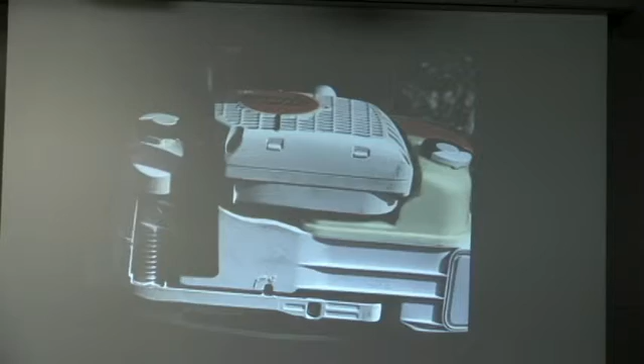Check the AV system and make sure all of the buffers are in place and functioning properly. Replace damaged, broken, or excessively worn buffers immediately, as they may result in loss of control of your chainsaw. A sponginess in the feel of the saw, increased vibration, or noticeable bottoming during normal operation may indicate damage, breakage, or excessive wear. If replacement is necessary, always replace the buffers in sets.

Check your air filter often. There are several different types and designs of air filters, and if yours is dirty, clean the filter according to the manufacturer's directions in the owner's manual, or replace it if necessary. Most filters can be cleaned temporarily by simply tapping them on a log, for instance, releasing the heavier particles that have built up on the filter.

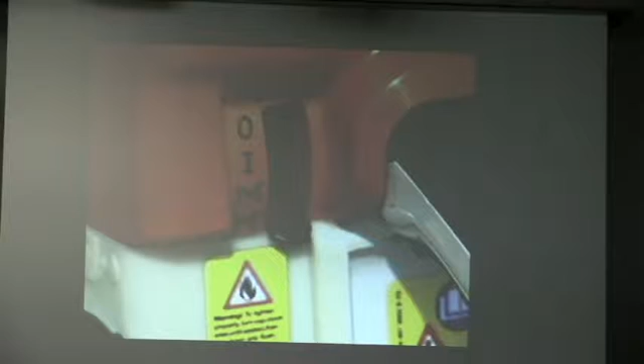A tip when accessing your air filter: always close the choke on your carburetor before removing the air filter. This will block sawdust or dirt from accidentally falling into the throat of the carburetor.

Occasionally, you will need to inspect your fuel filter. Be cautious not to do this around any open flames or other sources of ignition, as fumes from the tank are very flammable. Clean or replace the fuel filter as necessary, according to your owner's manual.

Make sure that the chain on your saw does not rotate on the bar when the saw is at idle. If the chain moves when the saw is idling, you must adjust the saw's idle using the proper adjustment screw on the carburetor. Check your owner's manual for more detailed information on your saw's idle screw placement and adjustment procedure. If you cannot get the chain to stop rotating at idle, take the saw to your authorized dealer for the necessary adjustments or repairs before using your saw.

Check your muffler and spark arrestor according to your manual's maintenance schedule. If you find that the spark arrestor is clogged or dirty, clean the part or replace it. Operating your saw with a clogged spark arrestor can cause serious damage to your saw's engine. Never operate your chainsaw without the spark arrestor, as the sparks from the muffler can easily start a fire.

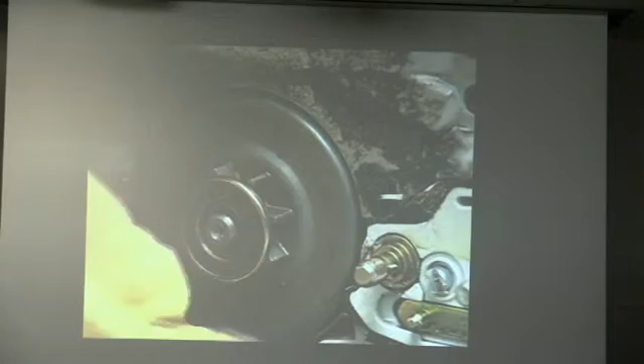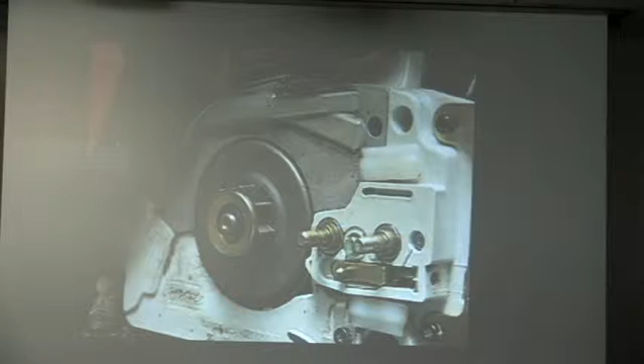The bar, chain, and sprocket will require frequent inspection and upkeep, and are some of the highest maintenance components of your chainsaw. There are two types of sprockets commonly used on chainsaws today: rim-type sprockets and spur sprockets. Sprockets will wear as the saw is used and will require replacement. A good rule of thumb is to install a new sprocket after every two chains that you wear out. Here is a new unworn rim sprocket, and this is a rim sprocket with considerable wear that should be replaced. This is a spur-type sprocket with no wear, and one that is worn and should be replaced as well.

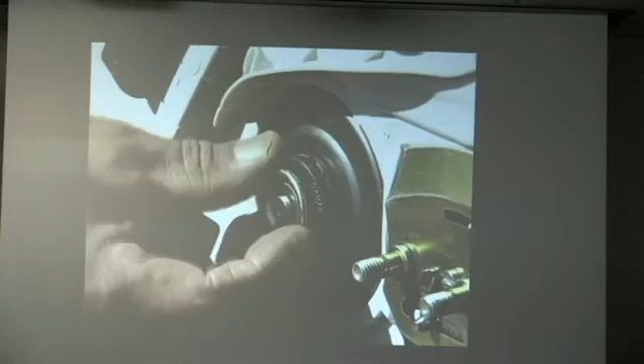The method for replacing your sprocket will depend on the mounting design used on your chainsaw. On most Stihl models, Stihl uses an outboard mount design that is very easy to service, even in the field. Simply remove the E-clip and the washer, and the rim slips off the clutch drum, and the drum and bearing will now slide off the crankshaft.

Now you can easily clean your parts and reinstall them, making sure to add a slight amount of high-temperature grease to the needle bearing and crankshaft. When reinstalling the drum on your Stihl saw, rotate it about one turn to make sure that you've engaged the oil pump drive.

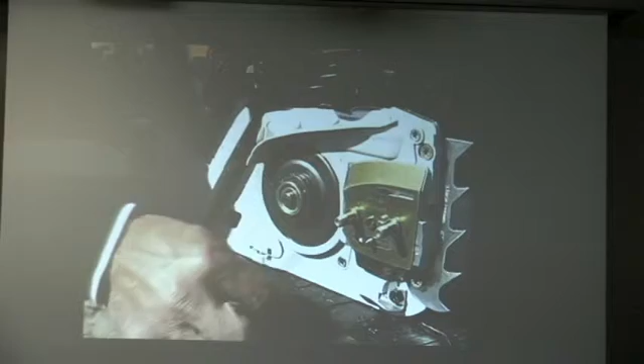Slip on the rim, and reinstall the washer and E-clip. Other styles may require the removal of the clutch first with special tools to access the sprocket for maintenance. Check your owner's manual for the procedure to properly replace your sprocket.

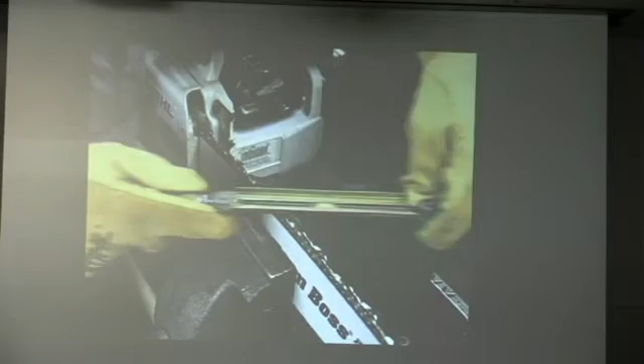Your saw chain will require sharpening. The frequency for sharpening your chain will depend on several factors, such as whether or not you have let the chain come into contact with the ground or any other foreign object, the type of wood you are cutting, and the amount of dirt or foreign objects that can be embedded in the wood.

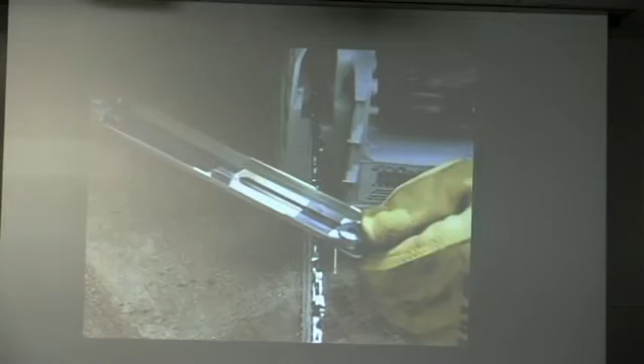Even a standing tree will have a certain amount of dirt embedded into its bark from wind-blown debris that will dull your chain over time. One good rule of thumb to make sure your chain remains sharp and in good condition is to file the chain with a few light strokes on each tooth using a file and guide each time you refuel, even if you think it's still sharp.

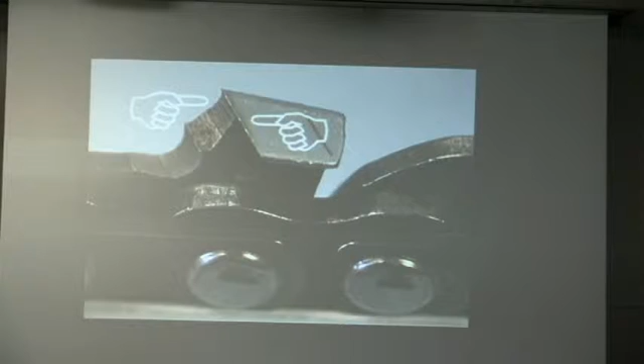You can determine the chain's condition by physically inspecting the cutter edges for rough or worn spots. Also, be sure to inspect the chain links and rivets for wear, cracks, or damage. If any part of your chain is cracked, worn, or damaged, you should replace it immediately and have the damaged chain inspected and repaired if possible by your authorized dealer.

In operation, your chainsaw is designed to cut effortlessly and with very little pressure applied by the operator. If you find that you have to apply excess pressure to the saw in order for it to cut, the chain is most likely dull. Or you may have a problem with your bar and chain lubrication system.

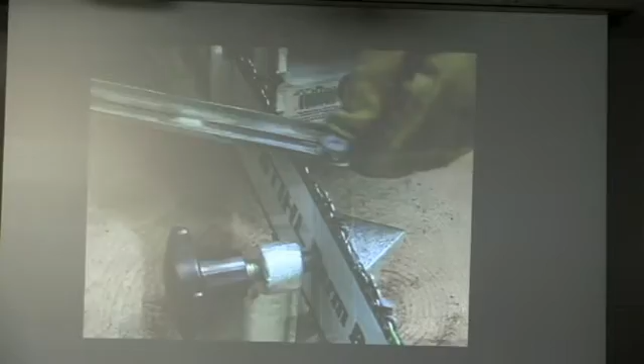Often when you find that you have to apply a lot of pressure to make the chainsaw cut, you will also see smoke coming off the tip of the bar, another good indication of the chain's condition or a lubrication problem. If these conditions occur, you may need to sharpen the chain immediately or replace it, and check the bar and chain lubrication system. To continue cutting with a dull chain or a lack of bar and chain lubricant will cause operator fatigue and a high rate of wear on critical parts of your chainsaw.

Another indicator to look for is if your chainsaw tends to drift right or left in the cut. This would indicate that the angles on your chain have been sharpened incorrectly and will need to be resharpened. Or it could mean that your bar rails have worn unevenly. This can also cause operator fatigue, unsafe operating conditions, or damage to your chainsaw.

With the right tools and instruction, you can maintain your STIHL bar, chain, and sprocket with confidence. Let's look at how you would perform this service in the field.

When you're ready to service the bar and chain, pick a large flat area to perform the work, such as the tailgate of a pickup truck. Remember, the chain has sharp edges, so always be sure to wear sturdy work gloves when handling the bar and chain. With the chainsaw engine turned off and the muffler cooled down and the chain brake released, use your bar wrench to loosen and remove the nuts on the chain sprocket cover.

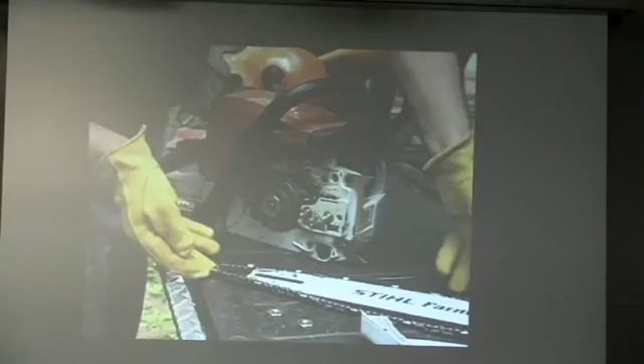Remove the cover, release the bar from the chain tensioner's adjustment pin, slide the bar back, and remove the chain and the bar. Check your sprocket and drum for wear and make sure they rotate freely.

If the sprocket is significantly worn, you should replace it.

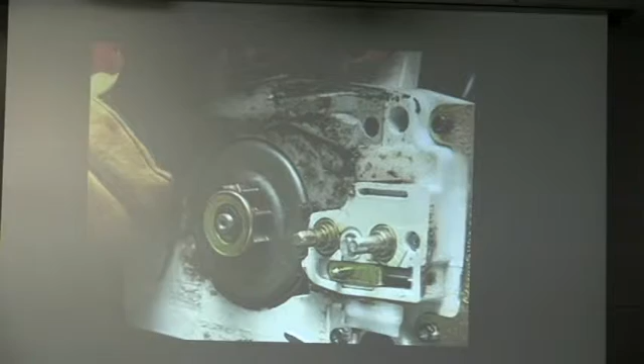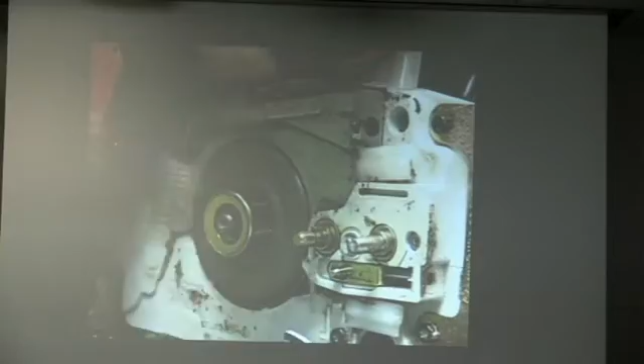At this point, it's a good idea to clean away the sawdust and debris that has built up on the saw with a rag. Even an old toothbrush can come in handy for this task. Clean the inside portion of the cover around the clutch drum area, taking special care to clean thoroughly around the automatic chain oiler's discharge area, not allowing anything to become lodged in the portal.

Your bar will also need to be checked and maintained. If your bar has a roller or sprocket nose, make sure that it rotates freely. Some bars may have a grease hole at the tip that will require greasing periodically. Check your owner's manual for the maintenance procedure for your chainsaw's guide bar.

Remember to always wear gloves when handling your bar, as the bar rails can become very sharp as they become worn. The rearward end of the bar will have a series of holes and slots.

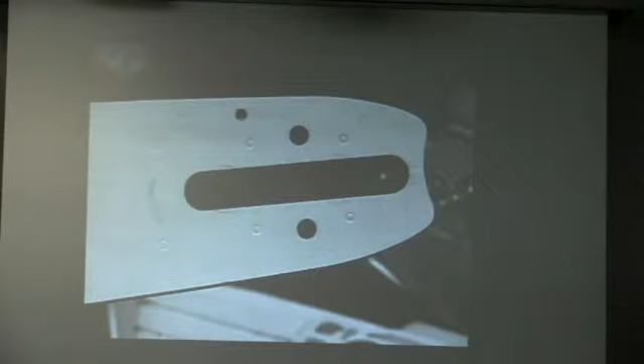These are the oil inlet hole, the chain tensioner's adjustment pin hole, and the bar stud slot. It is extremely important that these areas are completely free from dirt and impacted debris.

Through wear, you may find that your bar rails will form a rolled over edge. If this occurs, with a flat file, smooth the edges down, again making sure to wear gloves during the process. If the bar is severely worn, you will need to replace it.

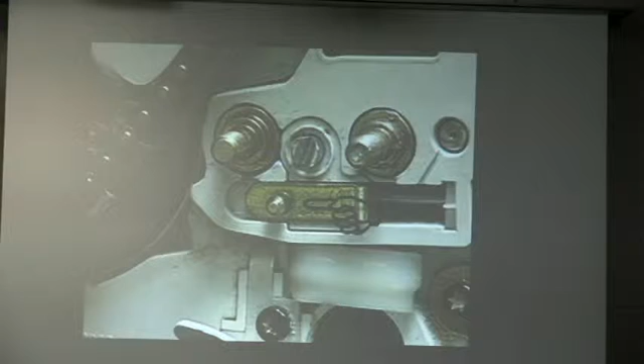Now that your components are cleaned, reinstall the guide bar on the saw. First, turn the chain tensioner's adjustment screw counterclockwise, allowing the pin to move back towards the sprocket. This will allow slack in the chain, making it easier to install.

When installing your guide bar, always place the bar with the opposite side up from when you last took it off. Doing so, you will displace the wear more evenly on both sides of the bar, resulting in a longer service life. Place your bar over the bar studs, sliding it as far back as you can.

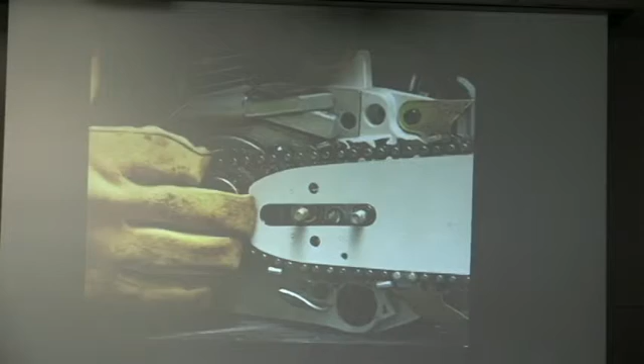Install the chain on the bar, making certain the cutting edge of the chain will rotate in a clockwise direction around the bar when looking at it from the sprocket side.

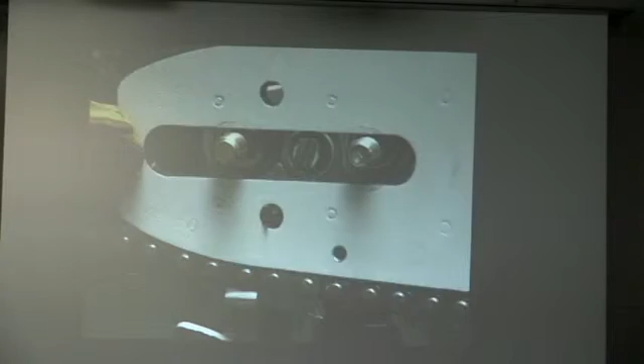Once the chain is placed on the bar, and the drivers are properly engaged with the sprocket, position the bar where the chain tensioner adjustment pin lines up with the proper hole in the guide bar.

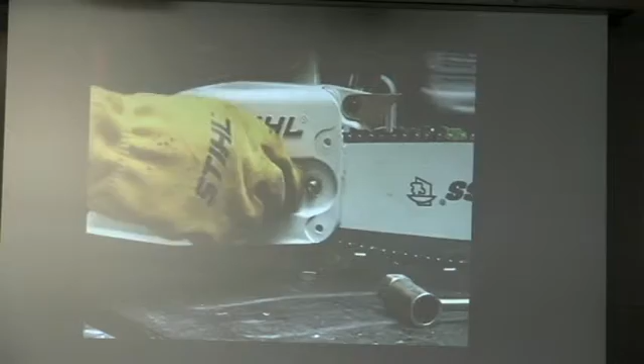Reinstall the chain sprocket cover and the nuts, but only finger tight, as you will need movement in the guide bar to adjust the chain. The bar will have slight up and down play.

To adjust your chain properly, turn the adjusting screw tensioning the chain to the point where it sits firmly against the bottom rail of the bar, but not so tight that the chain won't rotate freely around the bar. Continue to hold the tip of the bar up and tighten the nuts on the cover.

Double check your work by pulling down on the chain and letting it snap back, and by rotating the chain around the bar. If the chain doesn't snap back snugly against the bottom rail, you will need to tighten it some more. And if it won't rotate freely around the guide bar by hand, you have over-tightened the chain and will need to loosen it slightly. Repeat the adjustment process until the proper chain tension has been achieved.

As the chain gets hot, it will stretch, as well as wear through use. Constantly keep an eye on your chain's adjustment when working with the saw.

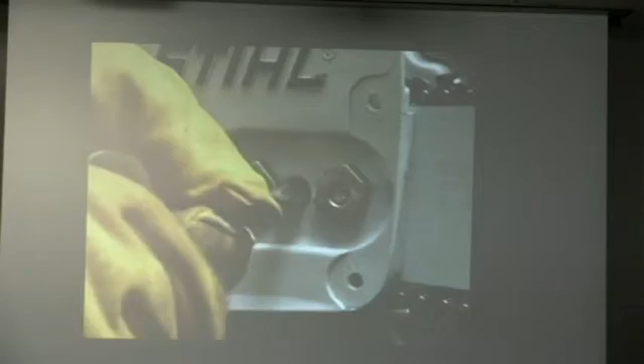If you see that it's loose, turn the saw off, let the muffler cool down, disengage the chain brake, and make the necessary adjustments. And remember, even a dull chain can be sharp enough to cut you, so always wear gloves when handling the chain or making adjustments.

A loose chain can cause serious damage to your saw, and if loose enough, it can even come off the bar, possibly causing serious injury to the operator.

If your chain appears to be sticking to the bar or will not rotate smoothly when you accelerate the saw, turn off the saw and check to see if you have bar and chain oil in the reservoir. You can check if your oiler is working by holding the tip of the guide bar near a fresh cut piece of wood, taking extreme precaution not to let the tip of the bar touch the wood, and accelerating the saw with the chain brake disengaged.

If the oiler is working, you will see a fine film of oil appear on the wood. If you have sufficient bar and chain oil, and your oiler is working properly, but the chain still will not rotate, you should take the saw to your nearest authorized dealer for the necessary repairs.

Now that you have cleaned your saw, reinstalled the bar and chain, and made the proper adjustments, it's time to sharpen your chain. A handy tool for sharpening the chain in the field is this stump vise that will hold the saw firmly while sharpening. If you are sharpening your chain in a workshop or garage, a bench vise will work just as handily.

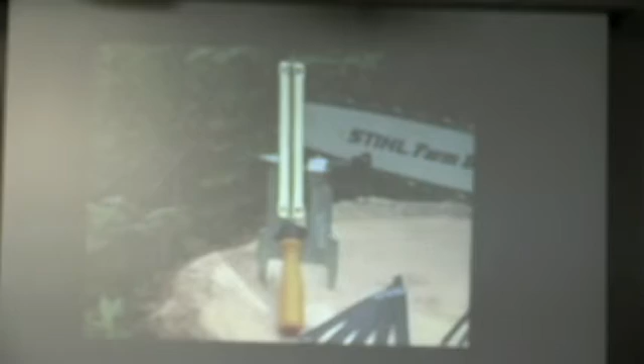Other items you will need to properly sharpen your chain are a file and guide with the proper size round file, a flat file, and a depth gauge tool. Check your owner's manual or ask your authorized dealer for the proper file size and depth gauge tool required for your saw's chain. This information can also be found in the chain leaflet packed with new loops of Stihl chain.

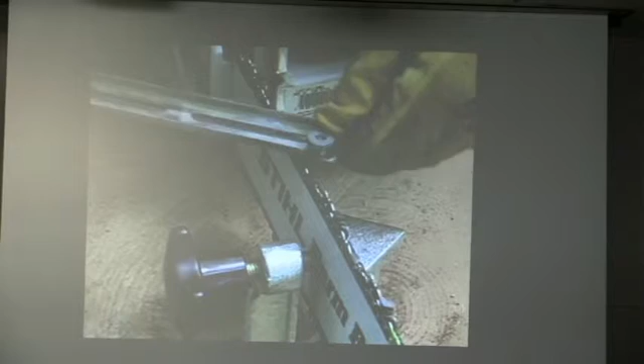Before we sharpen the chain, it will help you understand the process better if you know the different components that make up your chain. These are the cutters. Your chain has separate left and right-hand cutters. They are the parts you will be sharpening.

Located on the front of each cutter is a protrusion called the depth gauge, or as some people refer to it, the raker or drag. The depth gauge acts much like the adjustment on a hand-plane chisel and determines the depth of the cut or chip that the tooth will take.

The wider the gap between the tooth's cutting edge and the top of the depth gauge, the larger the chip the chain will take. If there were no gap between the cutting edge and the depth gauge, the chain virtually wouldn't cut at all. Your chain has been designed to cut optimally with a specific depth gauge clearance. Check your owner's manual or with your authorized dealer to see what gap is specified for your chain.

You can see that the cutter's top plate has a declining slope. As the tooth's cutting edges are sharpened back, the depth gauge will also need to be filed to maintain the recommended chip clearance between the tops of the depth gauge and the tooth's cutting edge.

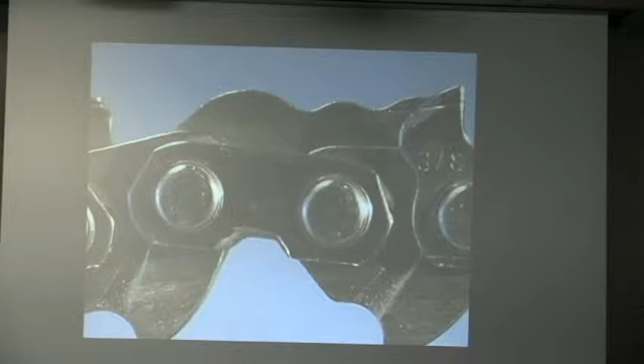The chain consists of a series of tie straps and rivets which hold the components together, separating the left and right-hand cutters alternately. This is the drive link. It has several functions: it's the portion of the chain that engages the sprocket, propelling the chain around the guide bar; it acts as a scooping device, dispersing the lubricant that comes from the oiler to components of the bar and chain; and it guides the chain in the bar groove.

For your chain to be sharpened properly, you must make sure that each tooth has been filed at the same specific angles with the proper file, that the top plate of each cutter tooth is the same length, and that the depth gauges are set at the proper height.

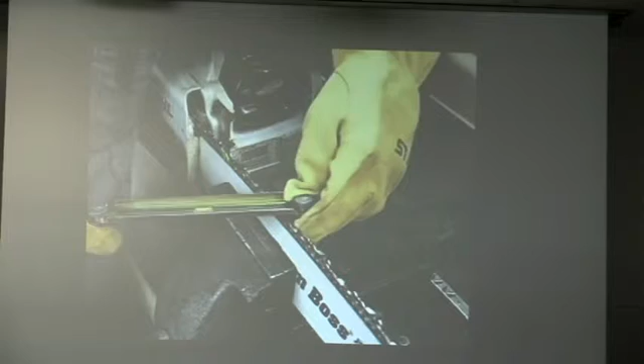Begin the process by looking for the cutter with the most damage or wear. This will become your master cutter. Once sharpened properly, this cutter's shape and length will be what all the other cutters should look like. Not doing so will result in poor cutting performance. Your chain will run roughly and could even break.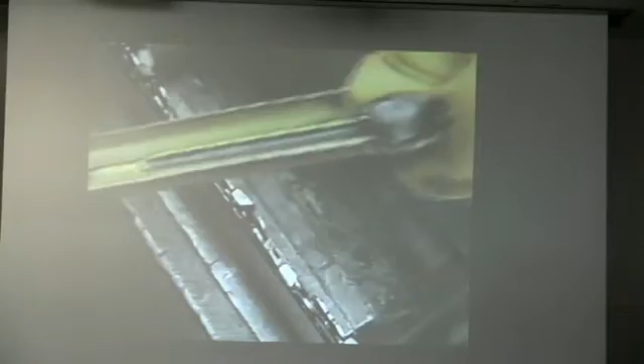As you file the first cutter, count the number of filing strokes that you take, and be conscious of the amount of pressure you're applying to the file. Using the same number of strokes with the same amount of pressure on the rest of your cutters should result in a consistent length on each. If you're uncertain, check the individual cutter's lengths with a measuring device. If you find that some teeth are longer than others, make the necessary sharpening adjustments. Always file the cutter from the inner portion outward. Never file from the outside in.

This will dull the chain and damage the file. When you're filing, never allow the file to drag back across the cutting edge when pulling the file back. Doing so will quickly dull your cutter and damage your file as well.

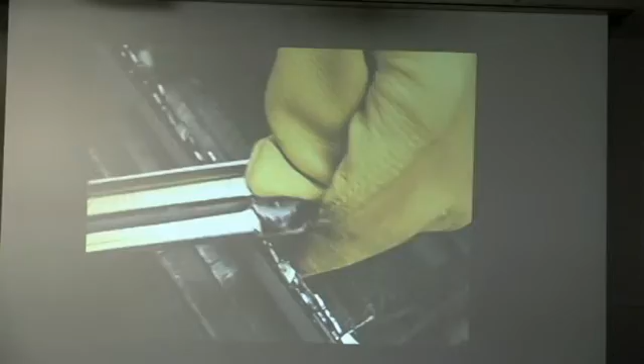Your file and guide has a plate positioned on both sides of the file. Placing the file and guide on the chain, the plate on one side of the file will rest on the leading edge of the cutter, while the other plate will rest on the top portion of the depth gauge. Equipped with the proper size round file, and assuming your depth gauges have been maintained in the past, this will give your round file the proper filing depth when sharpening, resulting in the proper edge on the cutter.

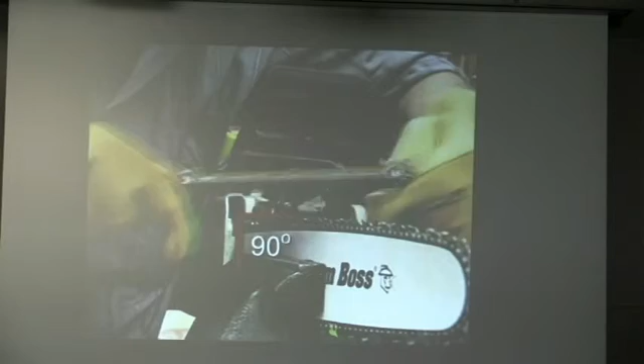Also, when filing, the file and guide should be held at a 90-degree angle to the bar, or level. Tilting the file and guide even slightly can result in a misfiled chain that won't function properly.

On the top of your file and guide, you will see lines scribed into the metal. These lines, kept parallel to the guide bar when sharpening each tooth, will result in the proper angle required for the tooth's cutting edge. When used properly, your file and guide will help assure a proper and consistent cutting angle and filing depth on each tooth.

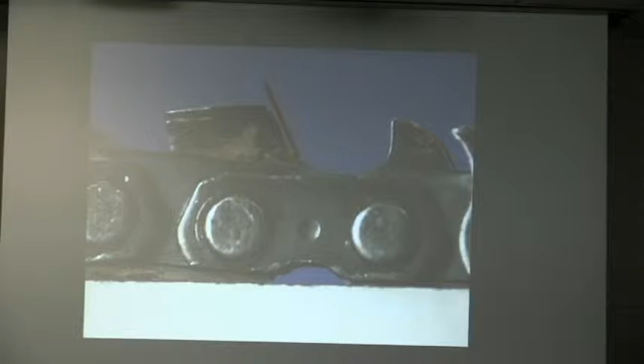This is how a properly sharpened cutter should look. Here is a cutter that has been improperly filed and has a severe back slope, a sign possibly indicating that too large a file was used.

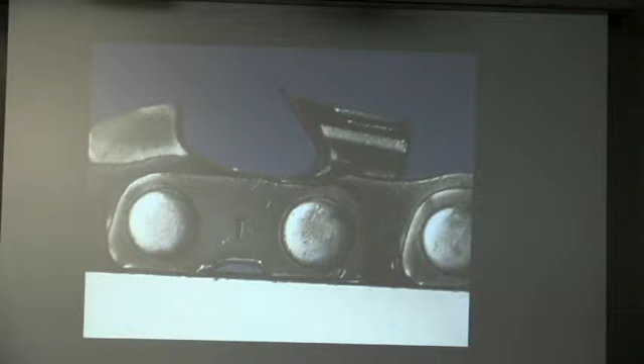This chain has a severe hook indicating that too small a round file was used, or that the file was pushed down too hard and allowed to drop too far down into the tooth during the filing process.

Remember to count your strokes, the amount of pressure you're applying to the file, and do not drag your file back across the cutter.

The right and left-hand cutters alternate, so you will need to file every other tooth from one side of the bar, or all of the right-hand cutters first, for instance. Then change to the other side to sharpen all of the left-hand cutters, again remembering to keep the angles and depth the same on all teeth.

Place the depth gauge tool on the chain as shown here, allowing the tooth's depth gauge to protrude in the slot of the tool. If any portion of the depth gauge protrudes above the slot in the tool, that portion will need to be filed down level with the depth gauge tool using your flat file. Perform this same procedure for every tooth.

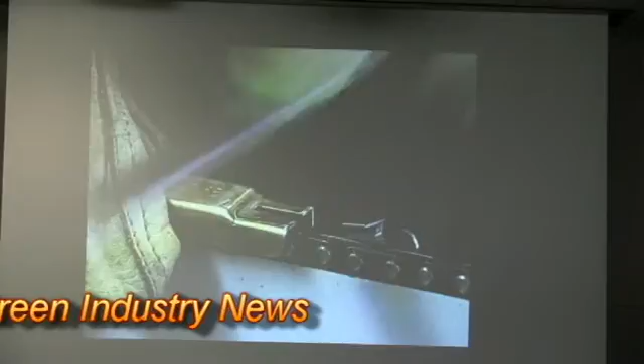If the depth gauges are not maintained and are too high, not allowing enough clearance, this will result in poor performance and reduce the chain's ability to cut.

If you don't use the proper depth gauge tool and file the depth gauges too low, below the manufacturer's specifications, this will result in a chain that cuts too aggressively, possibly causing harm to your saw and increasing the risk of kickback, making the chainsaw very unsafe, which can result in serious or even fatal injury to the operator.

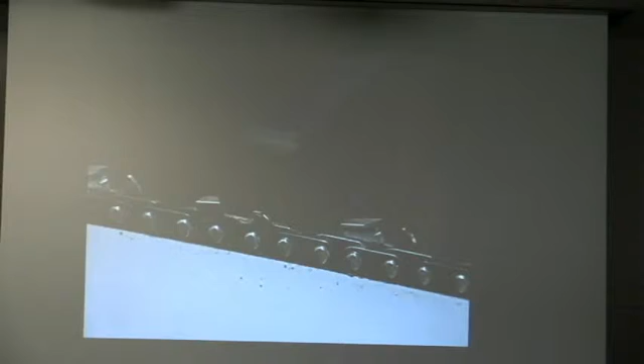If you have filed your chain's depth gauges several times, you may find the leading edge of the depth gauge will need to be dressed to conform to an angle similar to how it looked when it was new.

Stihl depth gauges have a line scribed into the metal showing the proper angle for the leading edge for you to follow. If you don't maintain this angle, it can result in excessive vibration when cutting, as well as diluting the low kickback properties on some chains.

For some people, sharpening a chain is very uncomfortable or even intimidating. If this is the case with you, you may want to keep one or more spare chains that are sharpened properly with you while you are working with your chainsaw. As your chain becomes dull, you can easily replace the dull chain with one of the sharpened spares.

When you're done with your work, return your dull chains to your authorized dealer where they can be properly sharpened on a specially designed electric chain grinder, and you will be ready to cut again with a set of freshly sharpened chains.

Next, check your chain brake to make sure it is functioning properly and that it engages and disengages. Like an automobile brake, your chainsaw's chain brake will incur wear each time it is engaged. The amount of wear will vary depending on usage or the conditions in which the saw is used. Excessive wear will reduce the effectiveness of the chain brake and can ultimately render it inoperable. Beyond your own inspection, you should always return your Stihl chainsaw to your authorized dealer to have the chain brake inspected according to the schedule found in your Stihl owner's manual.

With the engine running at idle, engage the chain brake by moving your left wrist forward while gripping the handle. Then accelerate the engine to full throttle for no more than about 3 seconds to avoid premature wear to the braking system or harm to the engine. The chain must not rotate. If the chain brake fails to function properly, it is imperative that you take your chainsaw to an authorized dealer for the proper repairs prior to using the chainsaw again.